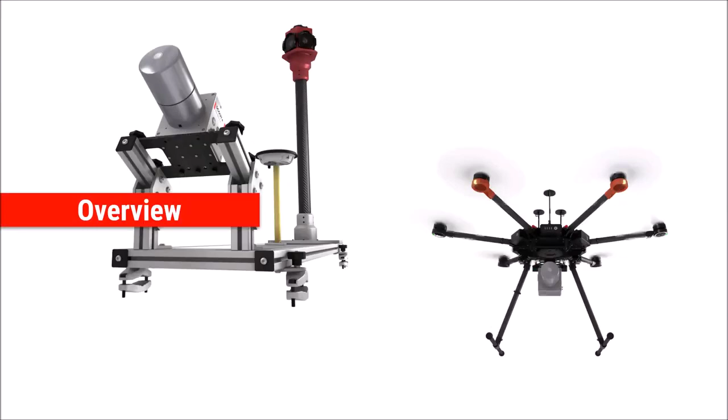So we'll start with an overview. So what is flexibility? Flexibility is the quality of being easily adapted or of offering many different options. And that is exactly what our solutions, our payloads do. They can be adapted to many different vehicles, and they offer a variety of options in the form of applications that are possible. So as I mentioned before, I would say our most common vehicles that we mount to are UAVs, cars, backpacks, and helicopters.

And these are some of the common verticals or applications that our solutions work well for. The construction industry, the mining industry, forestry, utility power lines. But the list really goes on and on. And all LiDAR scanners in general can achieve one of these tasks. But what separates us and what makes Phoenix LiDAR Systems so special is that we enable you to achieve multiple tasks through vehicle flexibility. So with the same system, you can capture topography, inspect utility installations, monitor construction sites, map natural disasters.

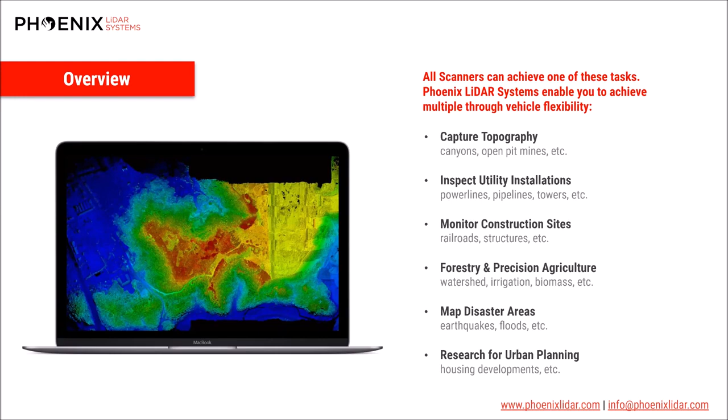And so a really big question is, why do this? Why is it beneficial to move a solution from one vehicle to another? And the answer is that different vehicles offer different distinct benefits. Whereas in the past, companies would need to use a separate personalized system for each application, now we make it possible so that you can take the same sensor, same payload, and mount it on different vehicles. Like in the past, a company would have a car-mounted system. They'd have to buy a different LiDAR system for, say, helicopter operations or something.

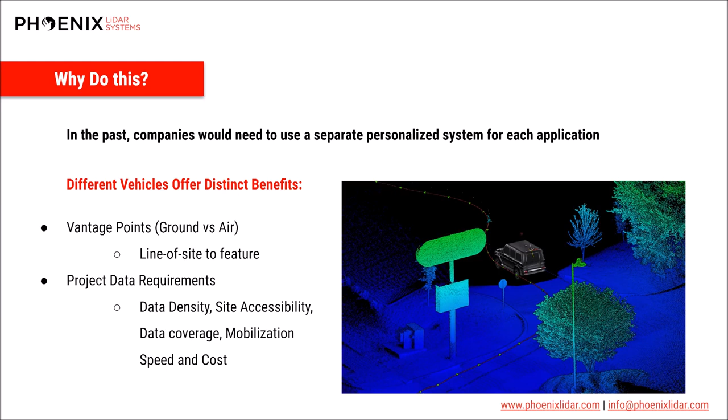So I'll get into some of the advantages per vehicle, and I'll start with the UAV. And this is not an exhaustive list by any means, but just some examples. So a UAV is great for site accessibility. You can essentially fly a UAV to any site. It is an inexpensive and easy vehicle to mobilize. Just throw it in your car, drive close to the site, and then fly the UAV a little bit further to your site, for example, or carry it onto site and then fly it.

And you can do nadir scanning with it, which is that top-down bird's eye view scan which is great for vegetation penetration. And from a UAV, you're flying relatively low, under 400 feet, so you get very dense data.

If we take a look at the car, a car is extremely dense data, the most dense. And since you are doing short ranging to targets, you'll have extremely high accuracy as well. And since you are side scanning, this is ideal for building wall detailing, capturing those wall features or poles, like I was mentioning before.

And when you're in a car, you know, how much gas do you have in the tank? You can drive for hours, and you can collect very large areas of interest and along long corridors. And a car is one of the most ubiquitous vehicles out there, so it's an easy vehicle to mobilize. They're everywhere, and they can be really inexpensive.

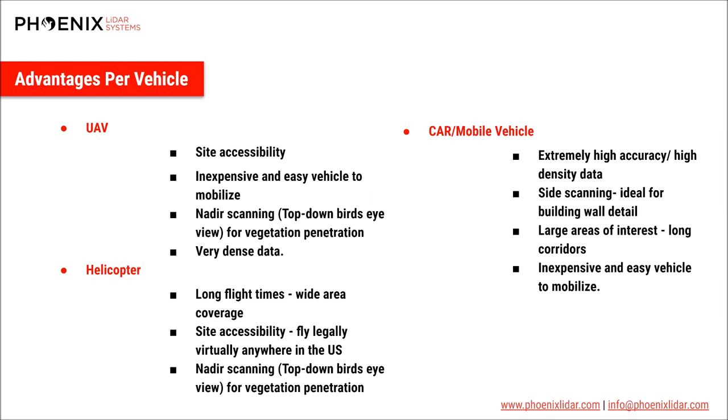And now let's look at some limitations for these three common vehicles. From a UAV, your data coverage is essentially limited to how many battery packs you have for your UAV. And so if you don't have a charging station and you only brought a couple of packs, then the amount of data you can collect that day is kind of dependent on those batteries of your aircraft.

And there are some airspace regulations. You can't fly in certain airspace. You can't get certain permissions, and you have a ceiling that you can fly up to, 400 feet, for example. And if you're scanning near buildings in urban environments, you may not capture the entire side of a building. Maybe you'll get part of it, maybe you'll get all of it, but a lot of times, depending on where your UAV is in relation to the building, you probably don't capture the entire side of it.

And that's where a car scan comes in, you can capture that entire side of the building. It's great for that, but it has its own limitations. Side scanning from the ground level is its own limitation because you cannot scan the entirety of deep depressions or ditches that are adjacent to a corridor when you're running a single pass. Or if you have undulations in terrain or in topography next to the road that you're scanning, you'll have data voids and laser shadows.

So when it comes to applications per vehicle, these are just some of the applications. But from a UAV, a great application is dense jungle canopy penetration. So you can fly really low and slow and penetrate that dense canopy and collect the micro topography digital terrain model from areas that you can barely even walk because they're so dense.

You can monitor coastal erosion or landslides, or do as-built construction mapping and disaster response mapping as well. Right after a natural disaster, maybe you can't drive the streets, but you can fly it. So that's a great application for UAV, quick to mobilize as well.

If we move on to the car, cars are great for topographic corridor mapping. So highways, railways, waterways from boats, for example, and city streets. And you're collecting such dense data that it's fantastic for roadside asset mapping and collecting poles and fire hydrants and that sort of thing, street signs. You can also assess road surface conditions from the high accuracy, high density LiDAR that you're collecting, and assess road geometry.

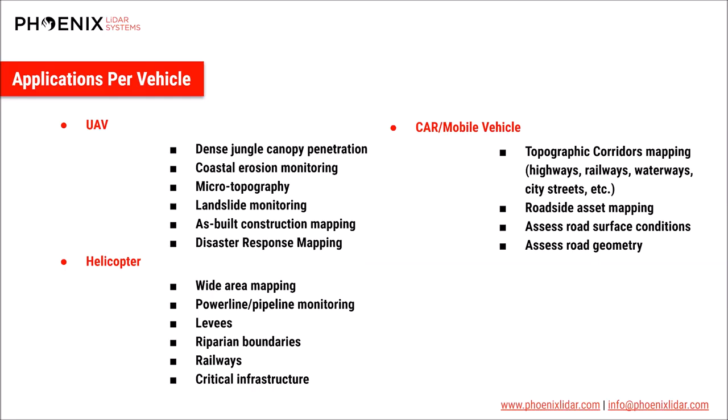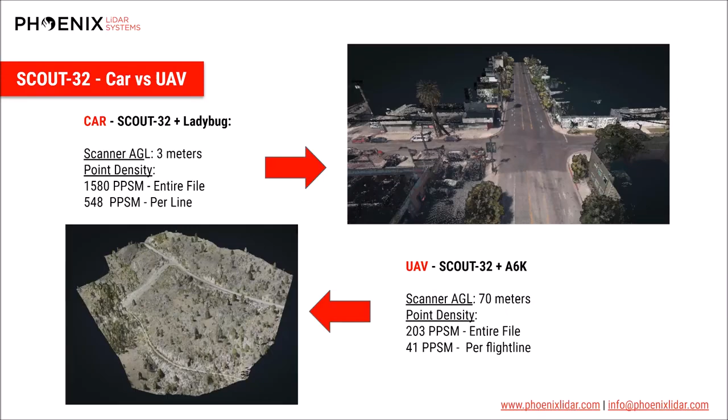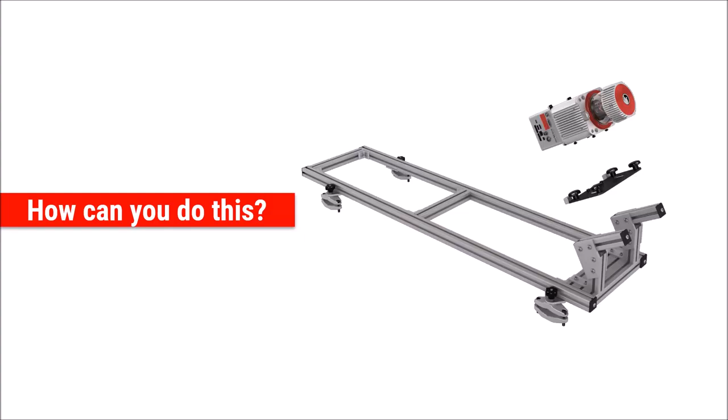So how can you do this? How can it be possible to use the same LiDAR scanner, the same payload, and move it from one vehicle to another? Well, when we're doing this, there are some considerations that we need to take into account when we're swapping vehicles. The main consideration is the system mount. How do you actually adhere it and attach it, mount it to the vehicle that you're operating? And with that, then there's cable and hardware connections. Do you use the same cabling for a car as for a UAV, for example?

Another thing to consider is the reference frames, which I'll get into in more detail later on, of your IMU and your sensors, and also your system calibration. Does that hold up, or do you have to do a whole other system calibration every time you mount it to a different vehicle? Another consideration is data collection. Can I use the same laptop and software if I'm scanning from a UAV versus a car, for example?

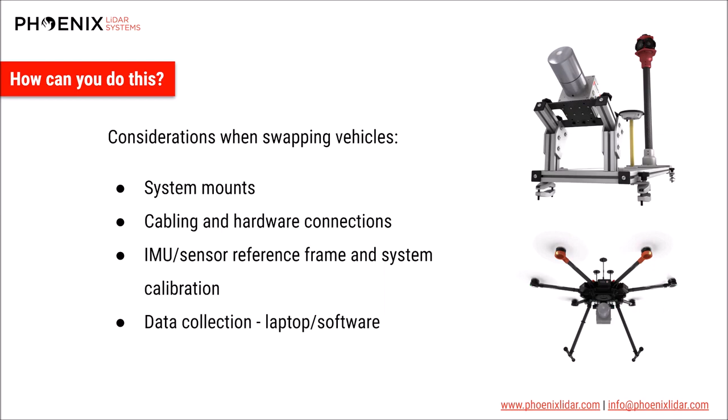So we'll start with mounting options. As you can see, we have a couple of the common mounts here. The UAV mount uses a quick release system, and same with the backpack. So those are pretty easy on, easy off. The car mount on the upper left, and then the helicopter on the bottom right, those are more bolt-on, bolt-off solutions. So with the car, for example, the vehicle mount, you would take your payload and you'd bolt it onto the mounting plate. And then that mounting plate has thumb screws to mount to the roof rack, which attaches that rigid frame to the top of your vehicle. And that allows the system to be mounted in the exact same location every time you mount it onto the vehicle.

For helicopter mounts, there are a couple different kinds of mounts. This is just one. If you're using a smaller aircraft like a Robinson R-44, you will need a heli boom, which we provide. And if you're using a larger aircraft like an A-Star or larger, you'll likely have a nose mount system. They'll have a Meeker mount. But either the boom or the Meeker mount attaches to our heli mount with vibration isolation, and then the payload bolts onto this mount.

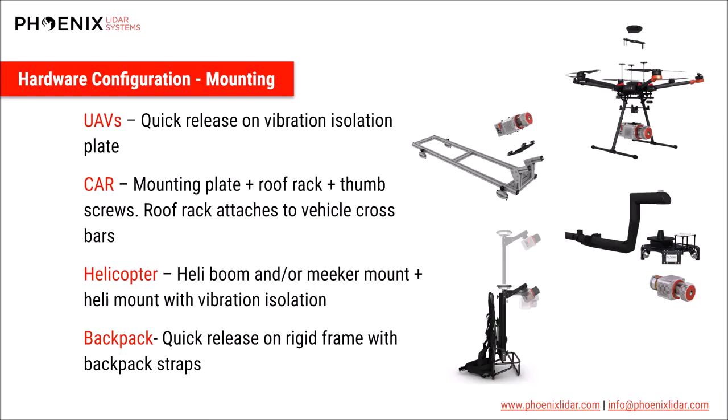And so in order to provide seamless transition from one vehicle to another, we provide custom cables with different lengths, and they have compatible connectors for any vehicle setup. One thing to consider here is, let's take the example of a helicopter setup versus a UAV. In a helicopter, the payload is mounted in the front of the helicopter, but the operator is in the back. So you have to have cabling run from the front of the aircraft into the aircraft, and that requires longer cabling. Whereas for a UAV setup, all the cabling is right there on the drone, and it's a lot shorter cables. So we provide you with all you need for whichever vehicle you're looking for.

I touched on this a little bit, but the main takeaway with these rigid mounts is that you avoid the need to recalibrate your system between vehicle swaps. The way we do that is because your IMU to LiDAR relative positioning is fixed. You can notice in the top image here, we have the LiDAR mount on the back with the IMU bolted onto it, and it's the same offsets as when we mount that payload onto the UAV. So it does not change from one vehicle to another. So our boresight calibration holds.

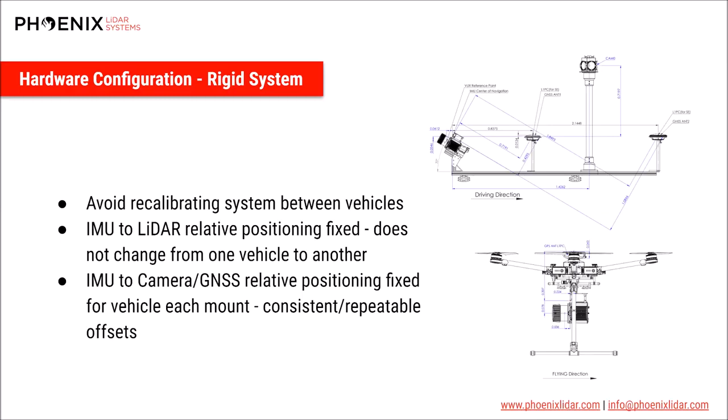And when it comes to data collection, you can use the same laptop and acquisition software for any system in any vehicle. And that makes it pretty easy. And the Spatial Explorer can handle a variety of different reference frames, which I will get into in the technical challenges, and coordinate systems as well. So it's your one-stop shop.

All right, so now I'll dive a little bit deeper into the technical challenges that we face when we swap a solution or a payload from one vehicle to another. The big question is, and the thing we need to know is the position and orientation of our sensors, so our LiDAR and our camera sensors, relative to the vehicle. So do we have our LiDAR facing vehicle backward, like in a car setup? Or do we have our LiDAR sensor facing vehicle forward, like in a helicopter setup? Does that make a difference?

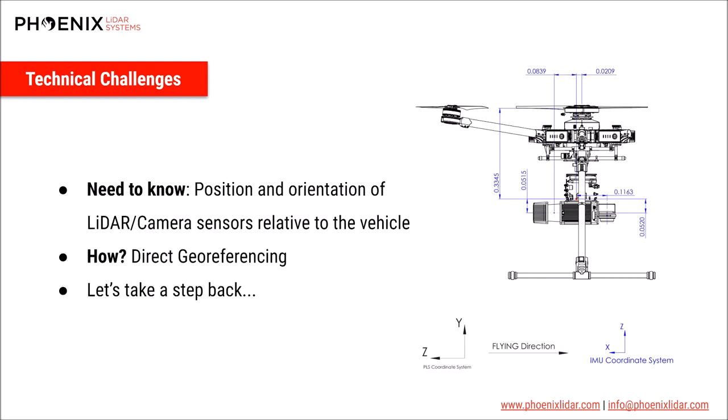The answer is yes. How do we overcome this? The short answer is direct georeferencing. And at this point, let's take a step back and we'll kind of get into what direct georeferencing is and what it does for us. So what is direct georeferencing? It is the direct determination of the position and orientation of the aircraft and sensors. And that's exactly what we want to know.

So how do we achieve this? We have some requirements, and they are fourfold. Number one, we need GNSS-aided inertial navigation. Number two, we need lever arm translations between sensors. Number three, we need to know some rotations, the IMU to sensor and IMU to vehicle reference frame rotation. And finally, we need a boresight calibration to dial everything in.

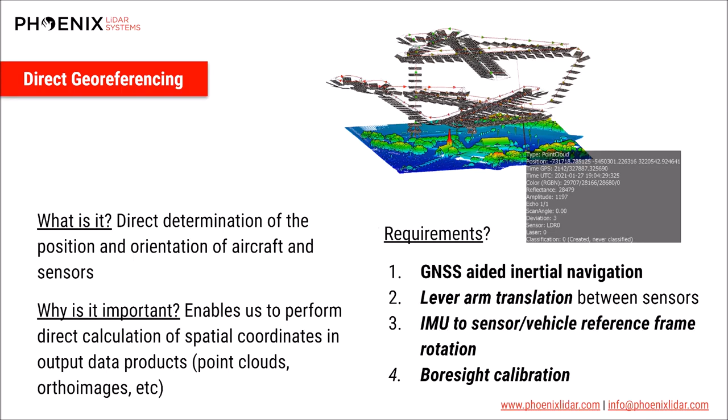So we'll start with requirement one. The first thing we need to know is our vehicle's position and orientation over time, AKA the trajectory. And this is determined using a GNSS-aided INS. So you might be asking yourself, what the heck's an INS? It's an inertial navigation system. And so it's a self-contained navigation system comprised of several subsystems. It has an IMU, a navigation computer, a power supply, and an interface, which we use Spatial Explorer. And it uses measured specific forces and rotations to estimate velocity, position, and orientation.

You might ask yourself, all right, if we have an INS, why do we need GNSS? And that's where aiding comes into play. And that's a process in which one or more sensors are used to provide data to another sensor. And the result is better data than could be obtained by any one individual sensor. So it improves on the accuracy of your trajectory.

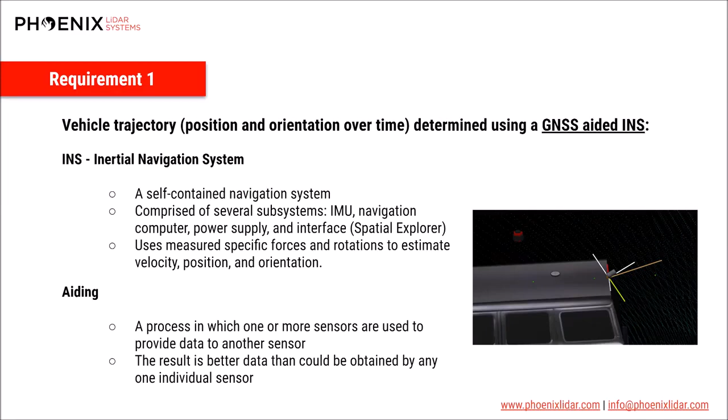So we'll start with the IMU to sensor lever arm, and this enables the sensor to have a known position relative to the IMU. And then the IMU to GNSS lever arm enables the IMU to have a known position relative to the vehicle position. So it ties everything together. We know where the vehicle is positioned and oriented, and because we have fixed offsets to our IMU and our sensors, we know where our sensors are positioned and oriented in space at all times.

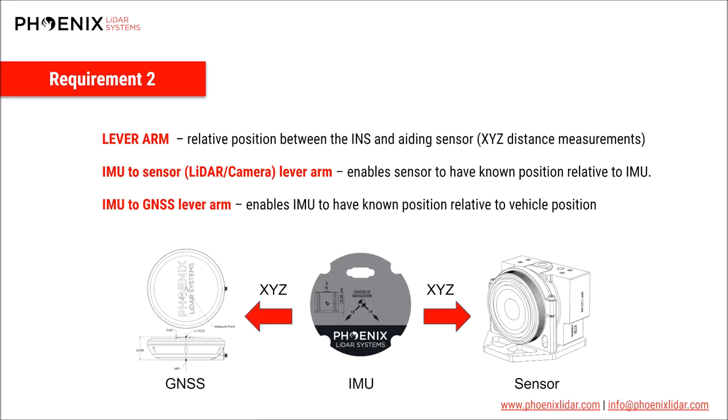All right, requirement three, and this is a very important step. This is an important step in both real-time and post-processing of the trajectory and the LiDAR and imagery data. And that is, we need to define two rotations. Number one, the IMU local level frame and the vehicle's body frame. And number two, the sensor local level frame and the vehicle's body frame.

So a local level frame is a reference frame in which one of the axes points up or down relative to the local level direction, and the other two axes lie in a tangent plane. So the bottom line here is that our X, Y, and Z reference frames are pointing in different directions for our IMU, our LiDAR, and our vehicle. And to put it very simply, we need to get our X's all in the same direction, our Ys, and our Zs. And how do we do that?

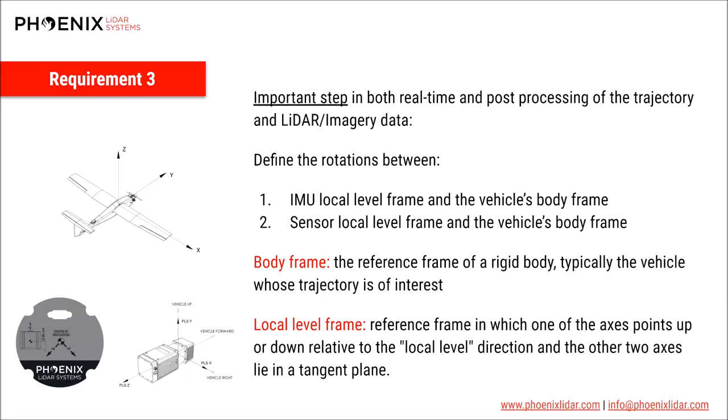We need some rotations. And that is accomplished through a direction cosine matrix, or DCM, which is a 3x3 matrix, at least for our application, defining the orientation of one frame relative to another. And this orientation, or attitude as it's called, and hence the direction cosine matrix elements, can then be parameterized by these things called Euler angles.

And Euler angles were named after Leonhard Euler from the 1700s. And he figured out the heading, pitch, and roll angles used to specify the attitude of the vehicle relative to the local level frame. And we use the Z rotation first, then X, and then Y in that order.

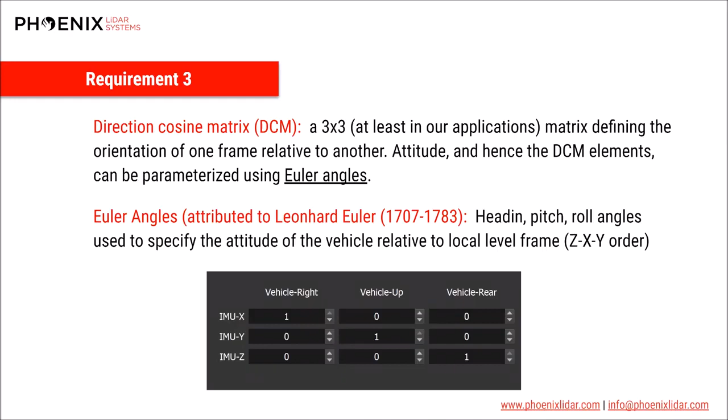And just to dive a little bit deeper, there are two ways to do this. The three elemental rotations may occur in one of two ways. It can be an extrinsic rotation or an intrinsic rotation. And Spatial Explorer can handle both. Down here, we have an image of Spatial Explorer version 5, for example, and you can calculate these different rotation combinations.

So for extrinsic rotations, we have rotations about a static coordinate system. So rotations about the axis of the original coordinate system, which remains motionless. An example of that is a Phoenix LiDAR Systems rotation. And then we have an intrinsic rotation, which are rotations about the axis of the rotating coordinate system, which changes its orientation after each elemental rotation. So basically you would rotate about the Z axis and your whole coordinate reference frame would change, then about the X axis, and that would rotate the whole coordinate system again, and so on.

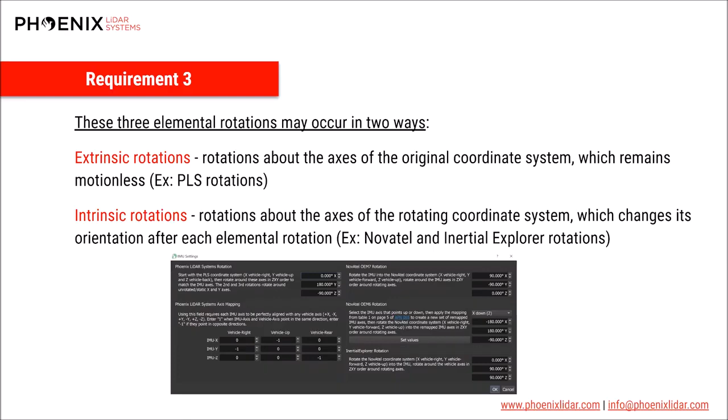So there can be some very small tweaks that you can make to these misalignment angles between your IMU and your LiDAR sensor. And then that's what really dials it in and gives you the accuracy that you're looking for in your LiDAR point cloud. And these points are colored by flight lines, so you can see how many different flight lines have passed over this building.

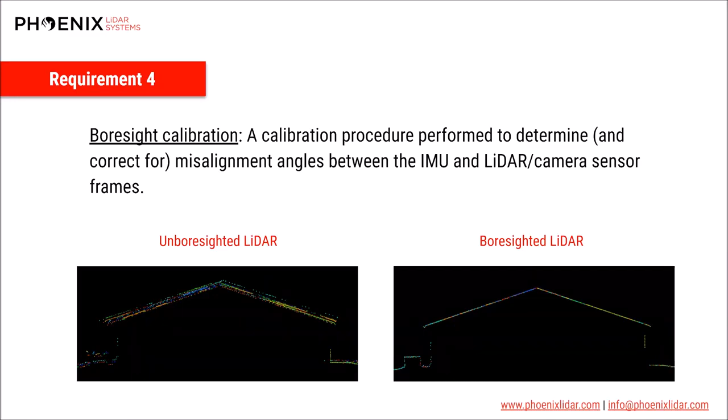So why do we care? How do we make it easy? Basically, Spatial Explorer version 6 simplifies all these technical challenges for you, makes it easy on the customer. Payload lever arms, rotations, and boresight calibrations in Spatial Explorer version 6 are all referenced to the IMU frame. And that's a pretty big deal, because in the past, everything was referenced to the vehicle frame, as I mentioned. And so basically, if your LiDAR sensor is mounted vehicle backward versus vehicle forward, you would have to adjust your lever arms, adjust your rotations.

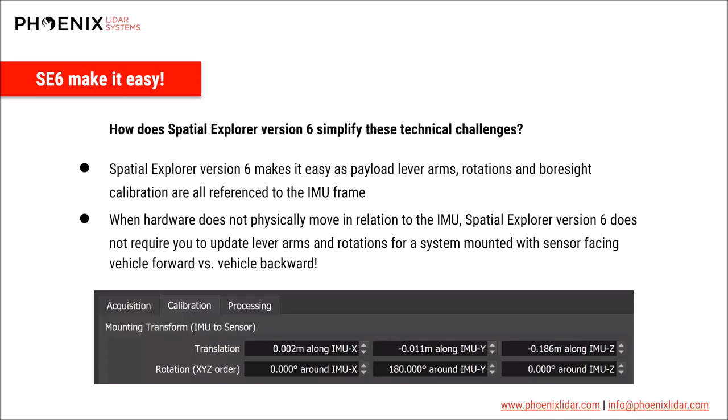And as you can see, it's kind of complex, but not anymore. So now when your hardware does not physically move in relation to the IMU, Spatial Explorer version 6 does not require you to update lever arms and rotations for a system mounted with sensor facing vehicle forward versus vehicle backward. And that is a big deal.

All right, so to sum up, the bottom line here is that in the past, a separate personalized system was required for each application. But now, through our innovations in system integration, companies can now easily deploy a LiDAR system mounted onto one vehicle and then seamlessly transition it to another vehicle as an all-in-one 3D mapping solution.

And what this does is it maximizes your return on investment by capitalizing on the benefits offered from disparate vehicles using a single scanner. So like we talked about, you could scan the tops of buildings and the sides of buildings at the same time, using the same payload or solution. And finally, we easily and seamlessly transition from one vehicle to another through a couple of things that the Phoenix LiDAR system does: rigid system mounting, custom cabling, and extremely user-friendly software.